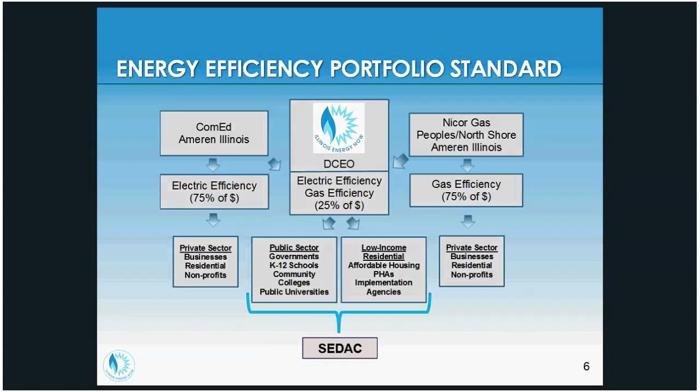So there's all kinds of incentives out there for improving your building operations. There's lighting incentives, changing your T12 lamps to T8 lamps, T8 lamps to reduced wattage T8 lamps, and lighting controls. You can find a lot of this information on our website, sedac.org.

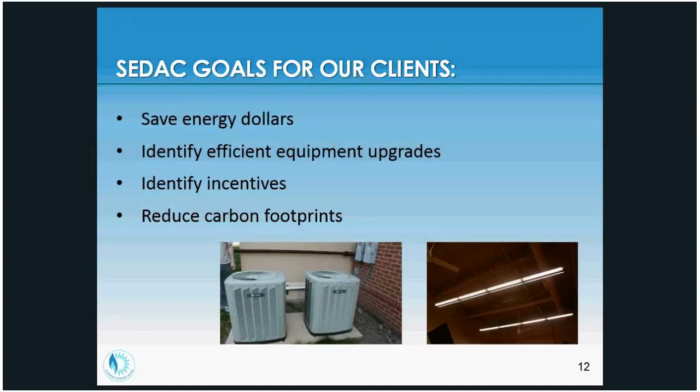There are different levels of analysis that we do. ASHRAE, the American Society of Heating, Refrigerating and Air-Conditioning Engineers, has 3 different levels of audits that are conducted. One is the basic walkthrough audit, that preliminary audit—that's what SEDAC does. We also do level 2, where we get a more in-depth analysis of how a facility uses energy. Level 3 is a very detailed audit, and that's beyond the scope of what we do.

We also provide portfolio analysis. This is if a client comes to us and says, I've got, for example, 8 schools in my school district and we'd like to do some audits. What we'll do is ask them for all the utility information for those facilities, then we'll benchmark those, and we'll prioritize where we should start looking—which buildings should we look at first, which buildings are performing very well and which aren't performing so well—so we can focus our efforts on those buildings that require the most help.

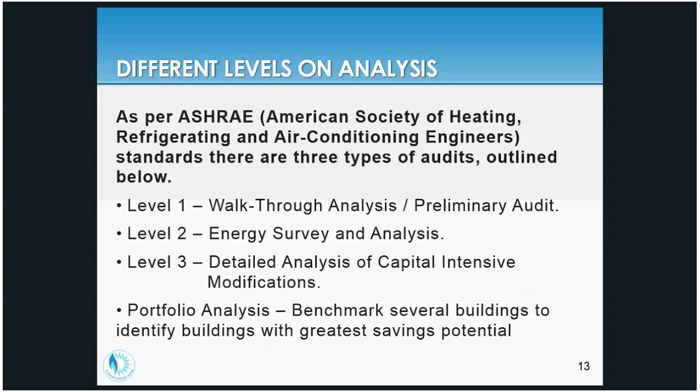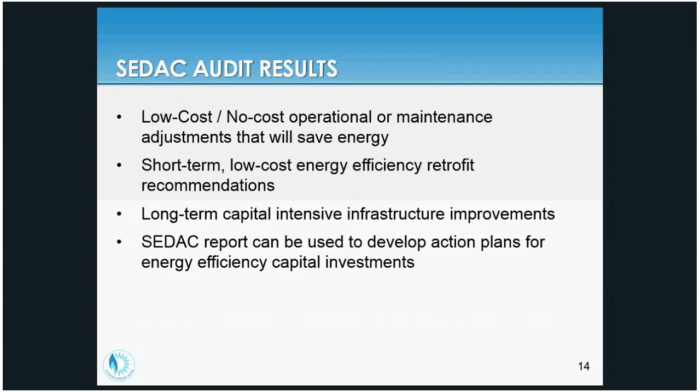So coming out of the results from our studies, there are low cost and no cost operational and maintenance adjustments, such as scheduling changes, that can help you save money. There are short-term, low-cost energy efficiency retrofit recommendations, such as changing lighting and putting in occupancy sensors. And then we also look at long-term, capital-intensive infrastructure improvements, such as new boilers, chillers, or energy recovery type equipment, which gets more expensive, and you might have to take out a loan for those types of things.

So where to start? When you contact SEDAC, we ask you for your utility bills, and we use those utility bills to do a benchmarking. It gives us a snapshot of how your building is performing at this moment in time. And if you have a portfolio of buildings, we'll take a look at all those buildings.

This is an example of a benchmarking table for one of our past projects. You can see in this particular facility, for this 2009-2010 period, they used over 2 million kilowatt hours, 217,000 therms. This cost almost close to $500,000 in utility costs, 54% of that in electricity, 46% natural gas.

This number in red here, this energy use intensity, is probably the most important number on this table. It tells us how much energy you are using per square foot per year. And the 58, that's not a bad number. We see anything from the lowest, probably in the low 30s, which is a very energy efficient building, to stuff sometimes - I'm looking at a building currently that's at 164, and that's bad. So this 58 isn't too bad.

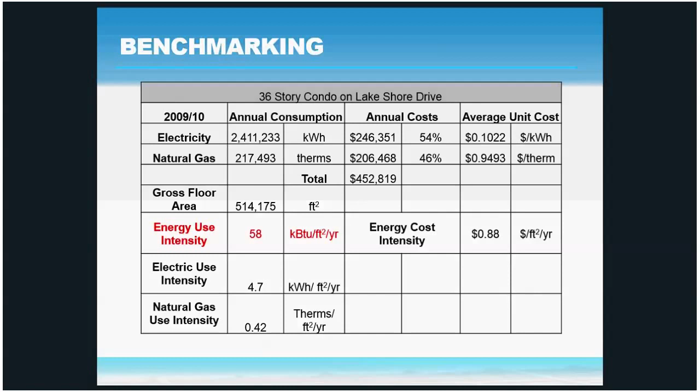So we get your utility bills, and we prefer to get more than just a single year of utility bills. You can see here there's about 2 years worth, from January 2010 to December of 2011, and you can see there's some funny stuff going on here.

These are cooling degree days, so it kind of tells us what the climate is like, and you can see that the consumption follows the weather patterns. But all of a sudden here it kind of goes awry and we're wondering, what happened there? So when we get these multiple years, that helps illustrate anomalies - if there's something strange going on, if something went out of whack, or some piece of equipment isn't functioning properly.

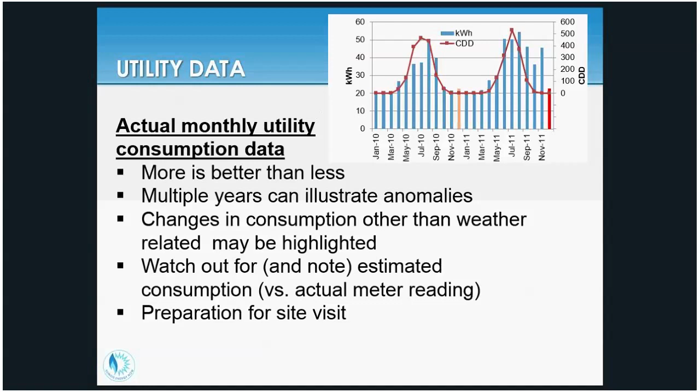So we try to get all this information before we go on the site visit so we can get a basic feel for how your facility is using energy and what to look for.

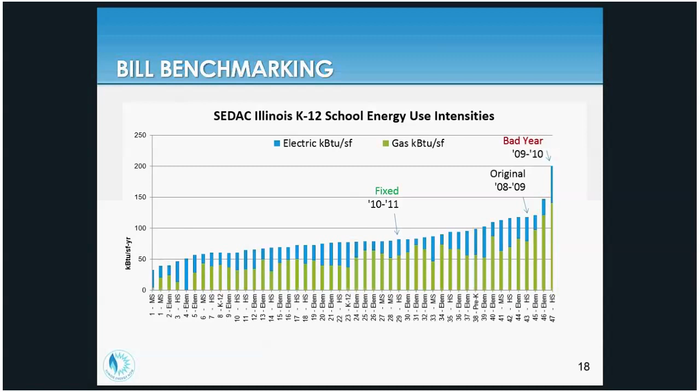We might also benchmark your building compared to a lot of other buildings. This is an example - SEDAC has looked at a lot of schools in the last 10 years, so we've got a database of a lot of information. Maybe we've also got courthouses and libraries and things of that nature that we've looked at, and we've got these graphs that show all these different facilities and where your building falls in that graph, among all these other similar types of facilities.

So this is some of the building analysis that we try to do before we go on site. It's amazing how much information you can really gather out of just the utility bills that you get from your utility company on a monthly basis.

So there's a strong correlation between gas usage and weather. Electricity, not quite so much, just because there's so many different things in the building that use electricity that really aren't weather related. Versus on the gas side, it's very weather related.

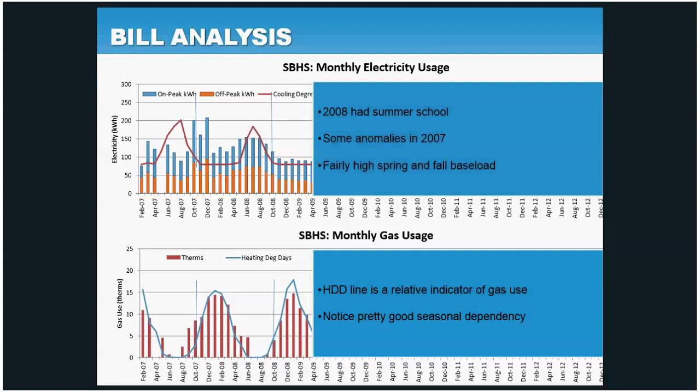So you can see here, some of our clients we've been working with for years. This is one of the school districts. In this particular school, you can see there's a fairly good fit here. There's something funny that happened over here, and then all of a sudden things start to really go awry, both on the electrical side and on the gas side.

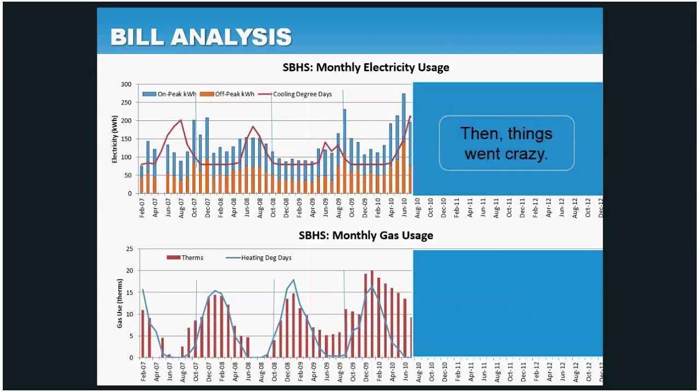And you're looking at this going, gosh, why am I using so much more gas than I would need to be using? You can see here where there were some building improvements made, and all of a sudden everything gets back where it should be.

So the difference between what you're seeing on this side of the graph over here on the electrical side and this, that represents a lot of money right there. Not only a lot of extra electrical consumption here, and a lot of extra gas consumption here, but that represents dollars that were spent unnecessarily.

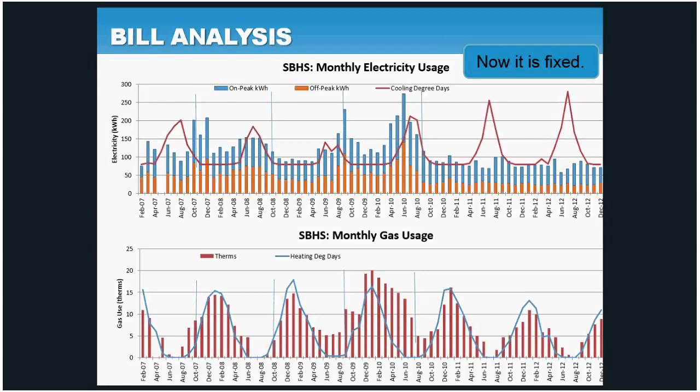So we analyze your utility information, and then we go to the site and meet with the managers on site. We really try to get the facility director or the maintenance folks to take us around and show us the building. They're the ones that understand how the building functions, what needs improvement, what's broken, and things of that nature. They can tell us about comfort complaints that occupants might have.

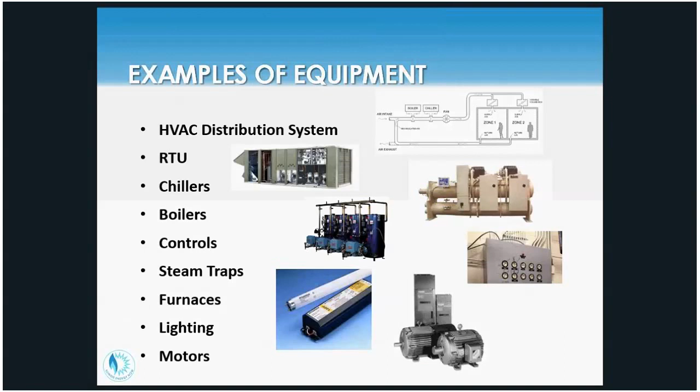So we look at a lot of different types of things when we're in the buildings: boilers, chillers, everything. We look at the envelope. We look at the building automation system too. That's a very important component — it tells us how things are running in the building.

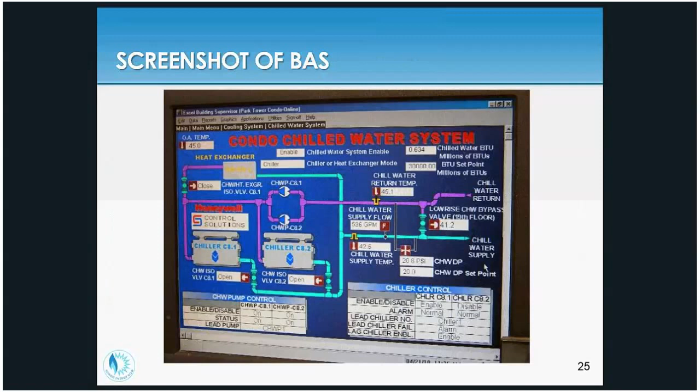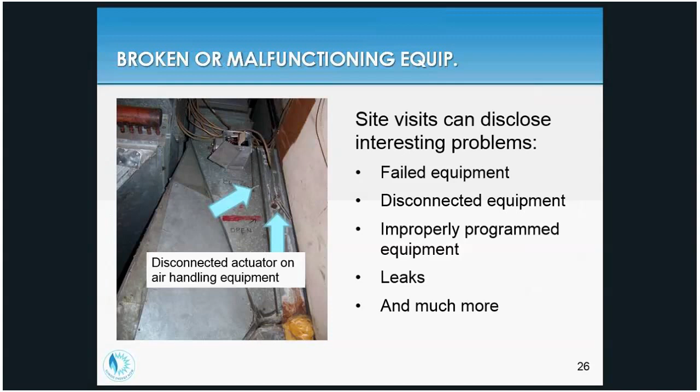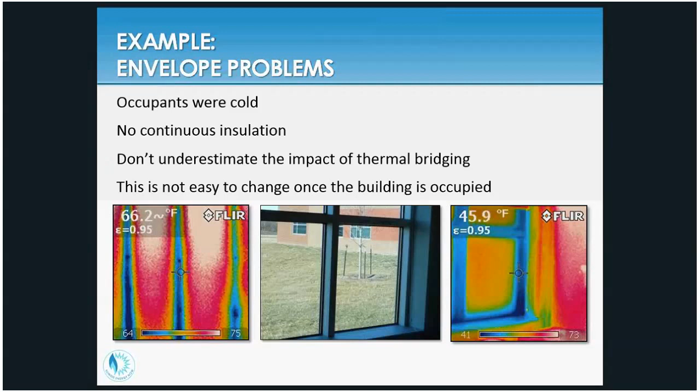Sometimes we encounter, such as here — it's hard to see on the slide, but it's a disconnected actuator. We'll find problems like this during our site visits where things are disconnected or improperly programmed. We'll find leaks and things of that nature, and all that stuff ends up in the report we write. We'll take a thermographic camera along sometimes, which takes pictures in the infrared spectrum and shows us where there might be building problems, where there are bridges to the outside, where heat transfer is worse than it should be.

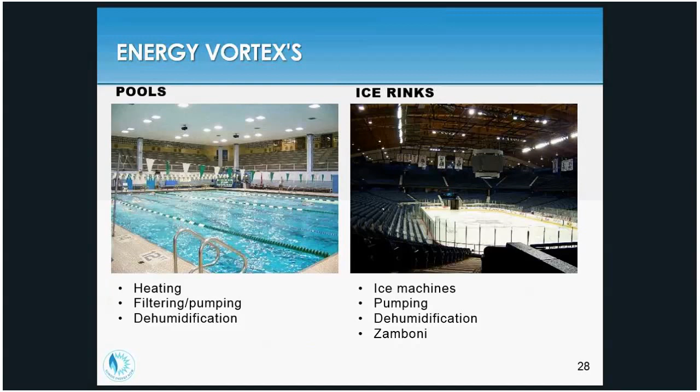In pools and ice rinks, we'll look at the heating, the filtering and pumping in pools, and dehumidification. These are very energy intensive spaces.

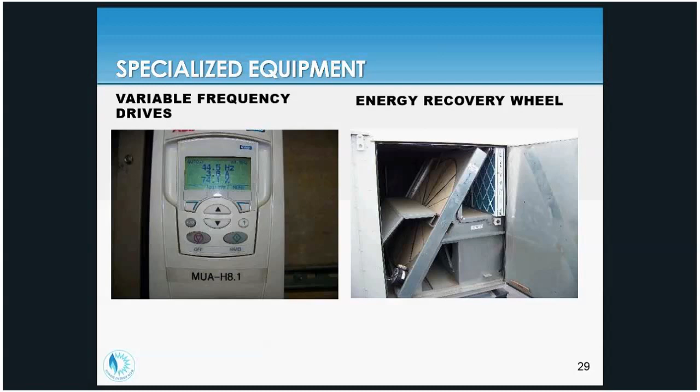We'll look to see if we can find any variable frequency drives, which cause motors to ramp up and down. Historically, motors were either on or off, and that's not the case these days. With variable frequency drives, we can ramp those motors up and down, and you can really achieve a lot of energy savings. Energy recovery equipment is also becoming more and more common.

So after the site visit, we'll give you a short list describing what we think would be a good retrofit for your building. We'll get some feedback from you to see if that sounds good, and those are what we then analyze here at the office.

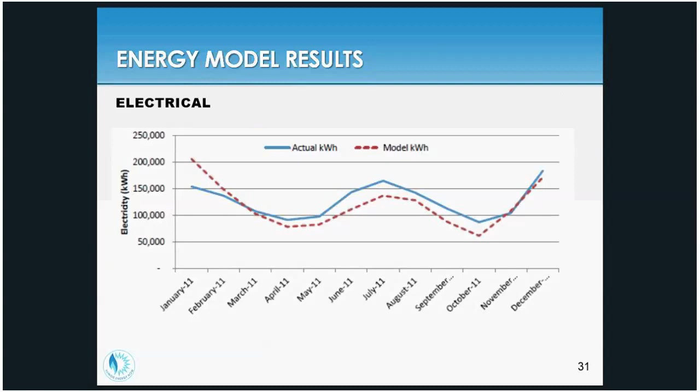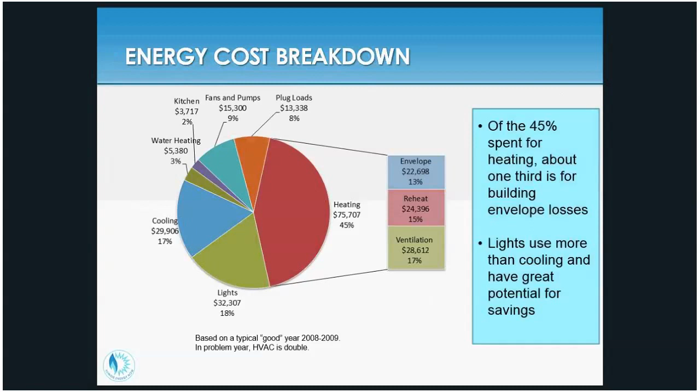We'll occasionally do energy models, which are software models describing the building to a piece of software, and then we can evaluate what are called ECRMs, energy cost reduction measures. With that model we'll also find out how much energy you're using for heating, lighting, and cooling. This shows us where we should apply our efforts on energy savings.

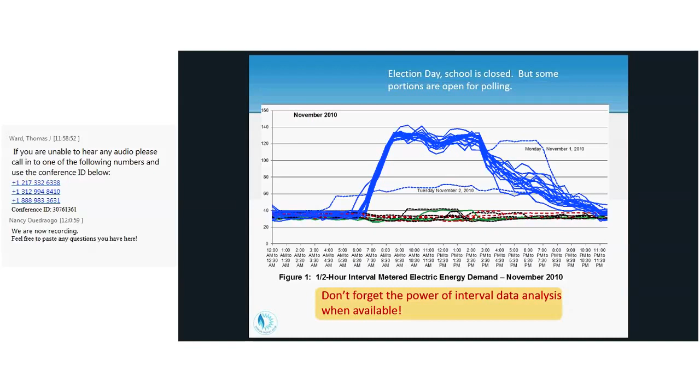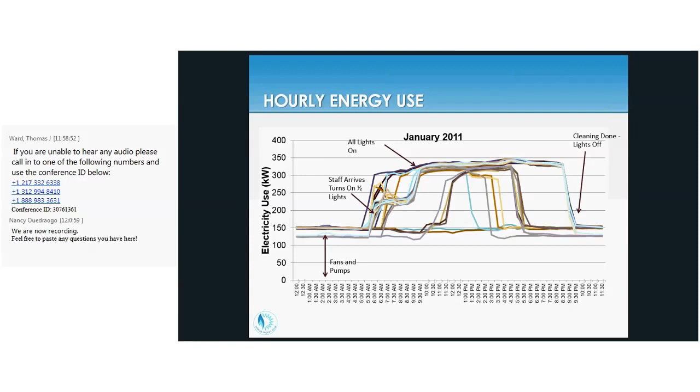We'll also sometimes look at interval data, which is data from the utility company taken every half hour or hour, and it tells us when things are turning on and off. That data can get pretty messy at times. You can see here everything's turning on at about 4 or 5 in the morning, running during the day, and shutting off by about 10 o'clock at night, whereas other things shut off earlier. It's powerful data, but it takes a while to work with.

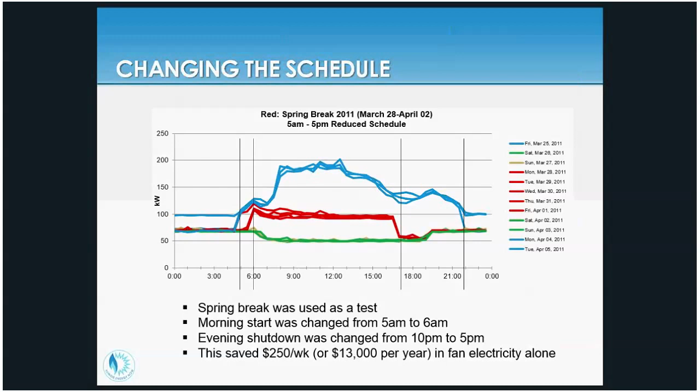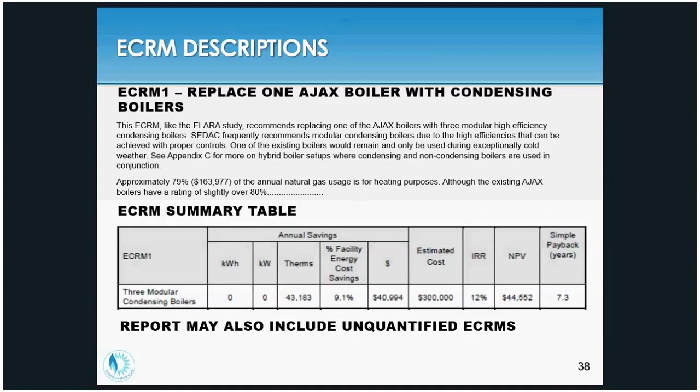Once we're done with our analysis, we send you a report. It has an executive summary, background information on our findings while we were in the field, benchmarking information, and our energy cost reduction measures with the economics we've analyzed. There's a description of these ECRMs, and a table showing the energy savings and the cost savings.

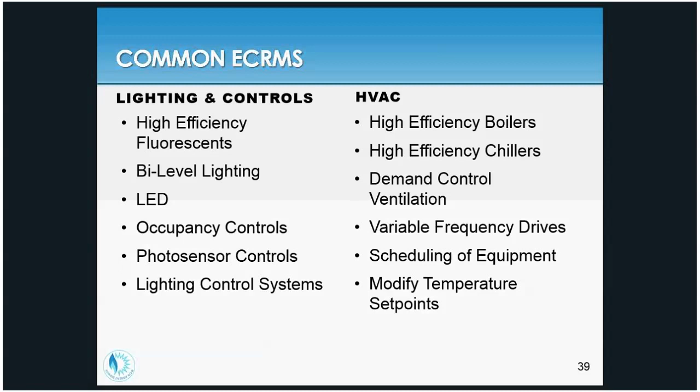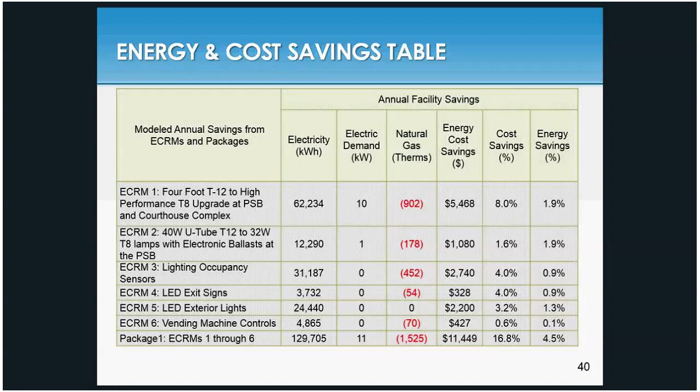The report will also have a listing of ECRMs, all the energy savings, and the economics — how much natural gas, how many kilowatt hours you're saving, and things of that nature.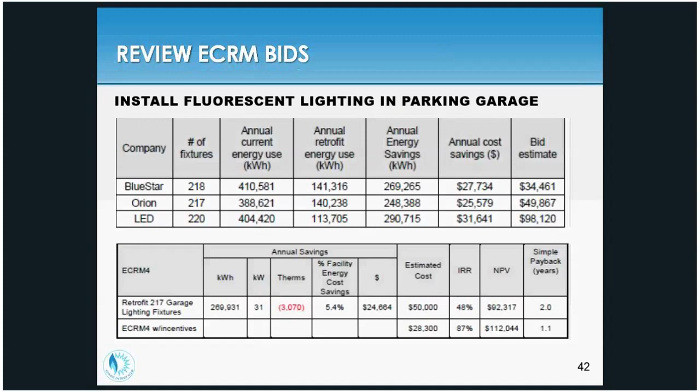Tables showing the capital cost — our estimated capital cost of these improvements — internal rate of return, net present value, and simple paybacks. We'll also review ECRM bids from vendors; we've done that for clients. And as I mentioned before, there are standard prescriptive incentives and also custom incentives.

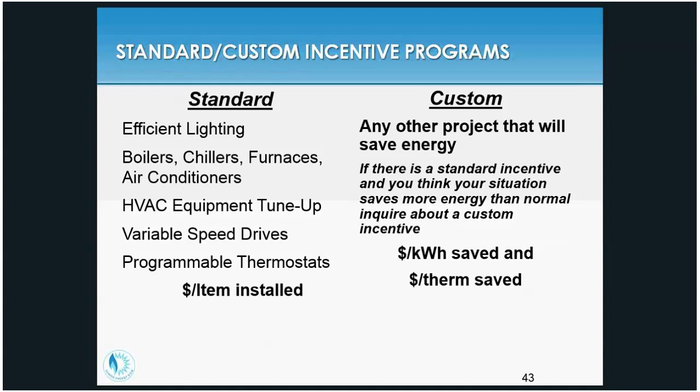So the top 10 energy strategies are lighting, plug loads such as computers. Computers are oftentimes left on all night, they really don't need to be. We look at ventilation, reduction of ventilation and heat recovery, condensing boilers for energy efficiency, VFDs, as I mentioned.

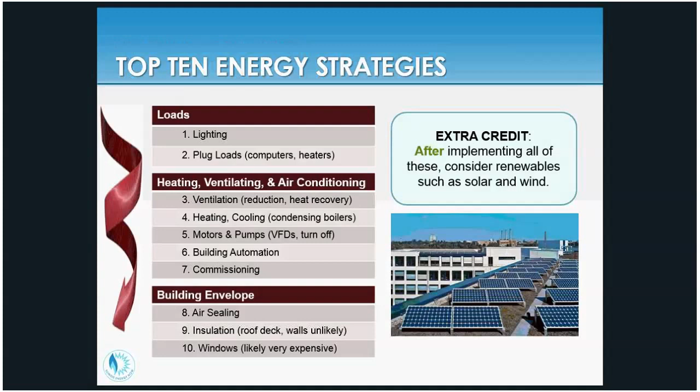We look at your building automation system and see if things can be scheduled differently. We look at the envelope and sometimes recommend air sealing, additional insulation if you're putting on a new roof, and sometimes for certain projects, windows too. But most envelope improvements, other than air sealing, are very expensive, so we don't recommend those too often, at least they can't be justified from a cost saving or energy saving standpoint.

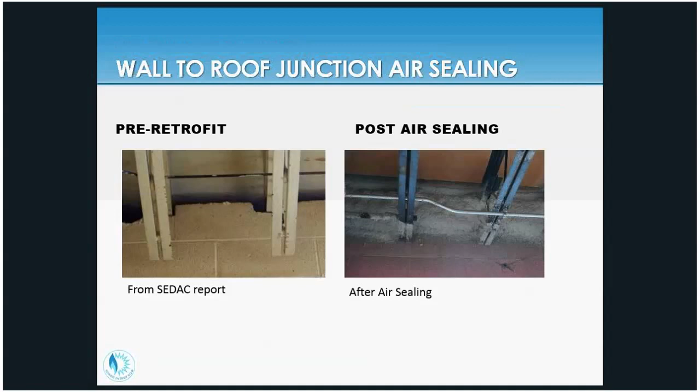This is an example of where we photographed this roof to wall junction, and this was in the report, and later this shows how the contractor sealed it with foam.

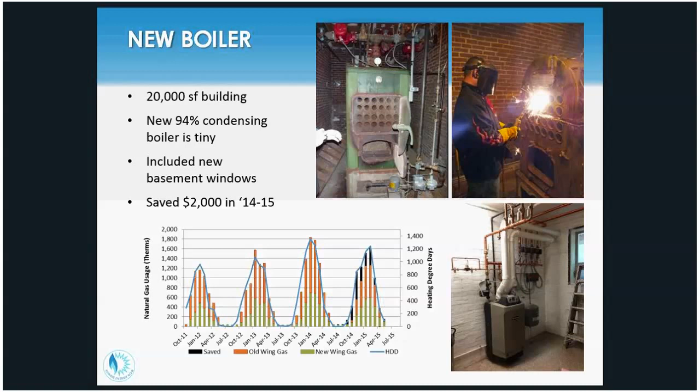These are just some large boilers. Let me skip over some things here. This is a smaller project where there was an existing boiler still working, but this was a church and they wanted to reduce their carbon footprint. You can see them taking out that boiler and replacing it with this very little itty-bitty condensing boiler. For this church, it's about a $2,000 per year savings. It's a long payback period, but this church is going to be around a long time, and they did it because they wanted to reduce their carbon footprint.

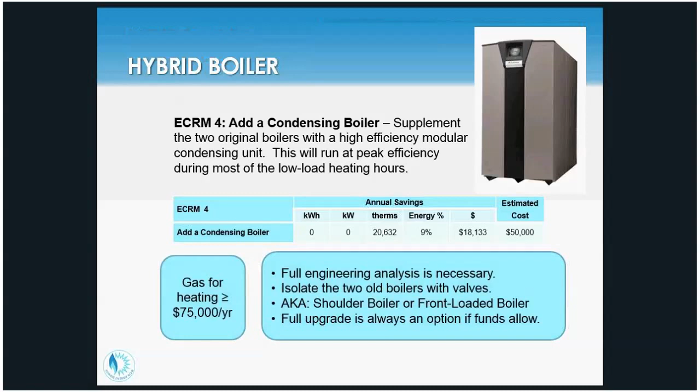Sometimes we will recommend a hybrid boiler system where you only remove one boiler out of a bank of, say, 4 boilers and put in a high efficiency boiler so it will run more often than the other older, inefficient boilers. It's a much cheaper way than tearing all your boilers out and replacing them.

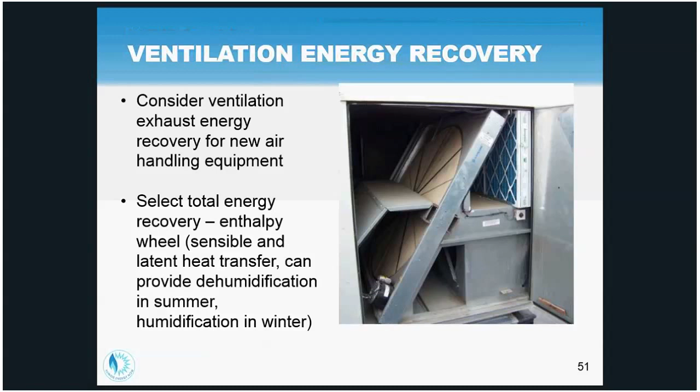We'll oftentimes recommend ventilation energy recovery, multi-level switching for new light fixtures, particularly in gymnasiums where you might have a 3 or 6 fixture lamp where you can only turn on 1, 2, or all 3, depending on what the venue is and the lighting needs. We recommend a lot of exterior LED lighting.

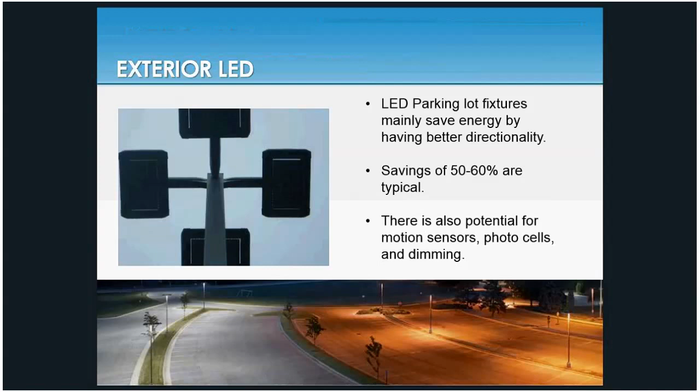So what we do is we try to identify where you can save energy, how much it's going to cost you, and how much of an incentive you can get. There's low cost, no cost improvements, no capital required, such as scheduling in your BAS system, low cost improvements for lighting, and then other ECRMs that are capital intensive.

And that is what Todd's going to talk to you about, how to finance some of these larger projects.

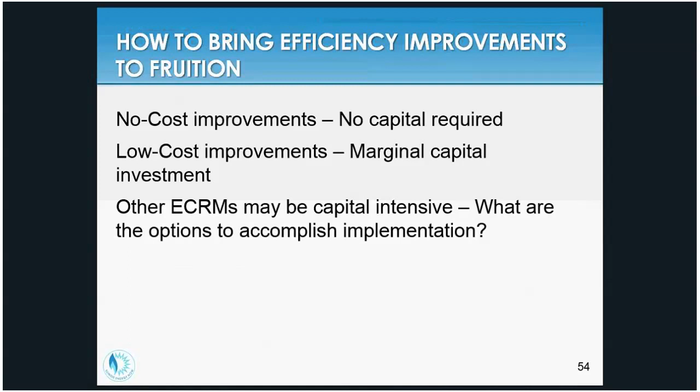So, Robert, as he mentioned, talked a lot about... Todd, yes. Sorry to interrupt, did you click the Takeover as Presenter button? I did. Okay, all right, just making sure. Yep, I'm not sure if you advanced your slide or not. Yep.

So Robert spent some time talking about what you would look for in an energy assessment in your building, and some of the energy efficiency measures that work in a lot of places, and some of the data analysis.

We find that a lot of places, especially counties and municipalities, or anyone in the public sector, are capital constrained, and so there are a lot of energy savings measures that are cost effective, but there's just not money in the budget right now or next year. There's always things coming up, and so we see a lot of cases where people say, we can invest in a project if it'll pay for itself in a year or 2 years, and that's great, but that leaves a lot of savings and operational improvements on the table.

There's a lot more cost-effective measures, and so the idea here is that we can look at energy savings as a revenue stream that you can borrow against. I'm sure many of you have heard about things like energy service contracts. Many of you work with a bank to do loans. Many of you are probably familiar with going out on the bond market to pay for big projects. And the argument here, and we're seeing more and more of this, is that you can treat your energy savings projects in a similar way, which helps alleviate some of the constraints with tight budgets.

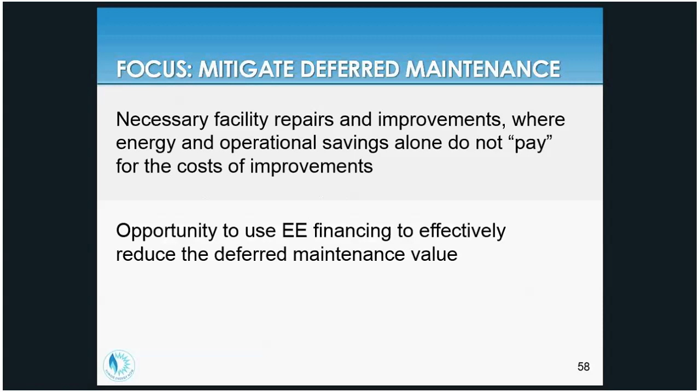So what I'd like to do is present some example scenarios and show how cash flow analysis could work, assuming some financing kinds of scenarios. This will give you a chance to see what it would look like if you were to proceed with something like this, and then I'll spend a little time talking about some of the financing sources that are currently available.

I'm going to talk about 4 different scenarios and try to keep it simple. We've got 2 buildings, a 50,000 square foot building and a 500,000 square foot building. And we'll talk about 2 different repayment terms: one is a shorter 5-year term, for shorter life types of measures, and one that's a longer repayment term, for longer life measures, equipment that will last a long time, like boilers and chillers and big heavy equipment. Obviously you don't want to be borrowing for a long period of time on something that's not going to last a long time.

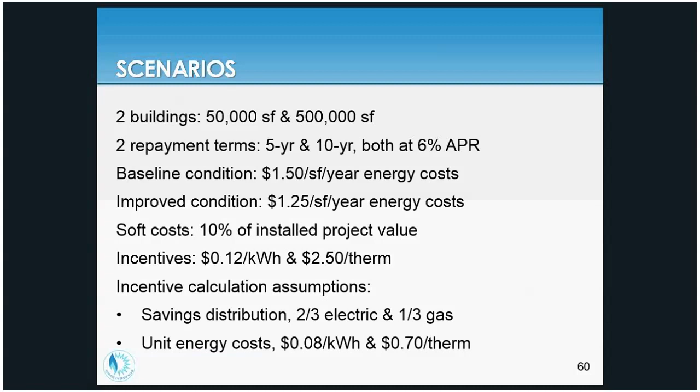In our 50,000 square foot building, if our baseline is $1.50 per square foot per year, then we have $75,000 per year in energy costs. If we take our savings scenario, that gives us a certain amount of savings. What I'm trying to show here is that level of savings, $12,500 per year, is worth up to a maximum project cost of about $60,000. So if you have a 20% down payment, a project that costs about $60,000 will realize an approximate break-even on cash flow, when you consider your loan payment and energy savings. The way to interpret this is if you have this size building, and you're talking about shorter life measures, and you're saving $12,500 per year, you're in a good financial position on a loan for a project that costs up to about $62,000.

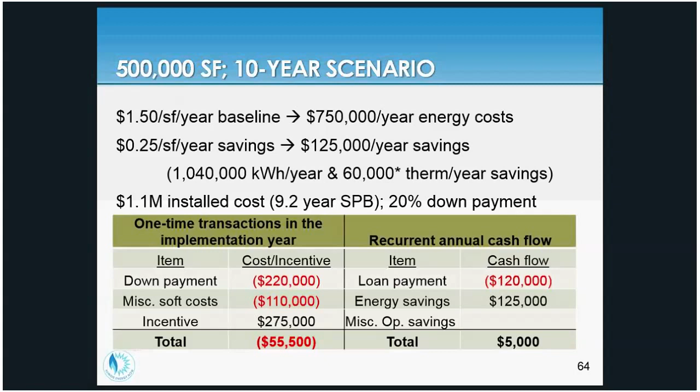You can afford up to a project of $1.1 million, and it looks like it's approximately cash flow even. This is the large building, with repayment over 10 years. Since it's a longer repayment term, you can afford a more expensive project.

So where is this money? Lots of you do business with banks, and I'm seeing more and more banks willing to entertain these types of transactions. They do want to know the source of information, how you're coming up with these savings, and what the assurance is.

There's also revolving loans and specialized kinds of funds. Some of your regional planning commissions or economic development commissions have special loans. I know locally here in Champaign County, the Economic Development Corporation has floated 0% interest loans to the county for different kinds of projects. US EPA and USDA Rural Development have special financing programs too. These are special cases, but some may apply to you.

Many of you are familiar with going out to the bond market for very large projects. Maybe you're not familiar with doing it for energy savings projects, but this is something that can be done.

Another thing becoming more and more common is the third party. We have energy performance contracts, ESCOs (energy service companies), and others. Sometimes it's an engineering firm in combination with some financing group, where somebody else is absorbing the performance risk and arranging the financing.